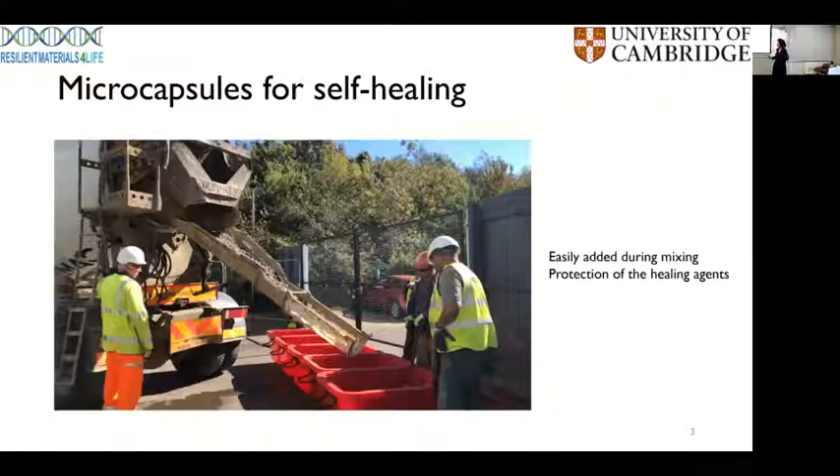And when we think about the history of people investigating microcapsules for self-healing, I think the first paper that I remember seeing was some papers with monofluorophosphate back in 2011. And I think the Pelletier paper with sodium silicate in polyurethane shells is also from 2011. Some earlier documents, when you think about the history, today it's a history class. When you think about the history of self-healing, there are some early documents of vascular systems with Dry in the early 90s. But when we are talking about capsules, they start in 2011.

And there has been a lot of progress since then from all kinds of materials, from minerals, epoxies, spores, MgO, and all the way to, I need to update this graph, but all the way to 2020. And two things that I would like to highlight from this process of producing microcapsules, now it's been 10 years that people have been investigating microcapsules for self-healing,

is that first, there are traditionally two methodologies to produce these microcapsules, broadly speaking. Either we are talking about having a liquid core, and those are all the processes that Dave was mentioning this morning, because then you have to produce an emulsion of this healing agent that is going to be your liquid core, and then deposit a shell on the interface of that emulsion, and then you have the core shell structure of the microcapsules that you want. It's either that way, or the other way, if you're encapsulating a core that is a powder or a solid core.

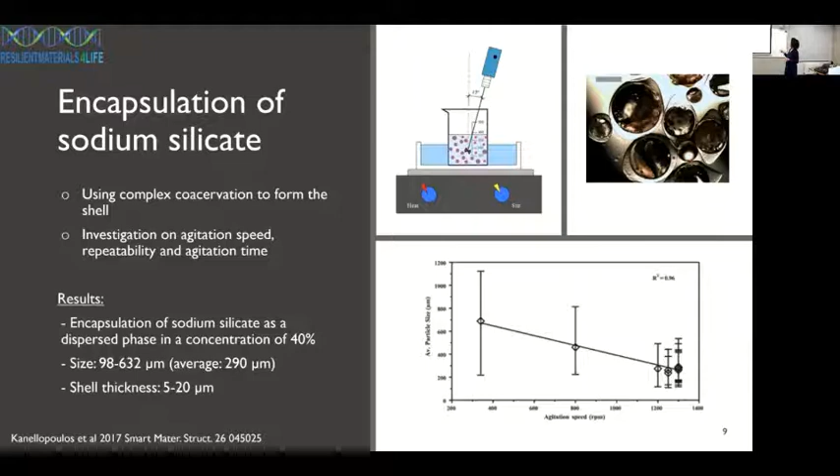But when I was talking before about the importance of fully characterizing the system as well, I included the thermogravimetric analysis to investigate the thermal stability of the shell, because you want to prove that it's stable. Some DMA analysis to investigate the mechanical properties of these shells.

I don't think that's the best SEM that I've ever seen in my life, but what it's basically showing here is the shell of that capsule after it was dried. One important property of these capsules is that when they are wet, they are very rubbery, as gelatin is when we're playing with it. But then when they are dry, they're very, very brittle, like those gelatin sheets when you buy them in the

supermarket. And that's very precious when we're talking about self-healing, because what you want is that the capsules are going to survive the mixing because they are rubbery. It will help with surviving the mixing. But then when they dry out, they are very brittle, and the crack is going to easily trigger the microcapsules as well. And FTIR for characterization of these capsules as well.

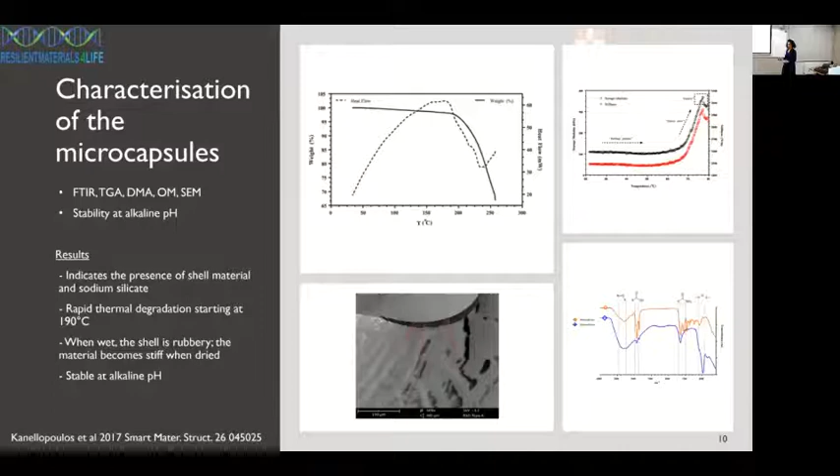And another thing that I didn't mention, but I'm mentioning now, is the stability of these microcapsules on pH, because you will, of course, want this capsule to be stable at high pH because it's the pH of the matrix.

When these capsules were embedded in cement paste, it's quite interesting because you can see the release of the core immediately. I don't think that's the best image, but as soon as you break that capsule, you can see the oil coming out of the capsules. They have a very good bond with the matrix, which is quite valuable for the capsules as well.

And it's interesting that they are fluorescent under UV exposure as well. So you can clearly see those capsules using optical microscopy to investigate the homogeneous dispersion of these capsules in the cementitious matrix.

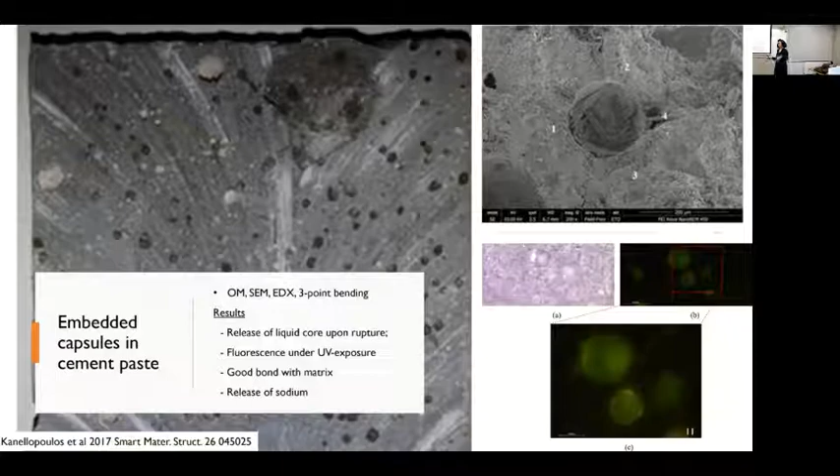When we were assessing the self-healing capacity of these microcapsules, those are the concentrations that were investigated. And what we see is that, yes, there is an increase of viscosity and a decrease in compressive strength by adding these microcapsules. And that's an interesting point.

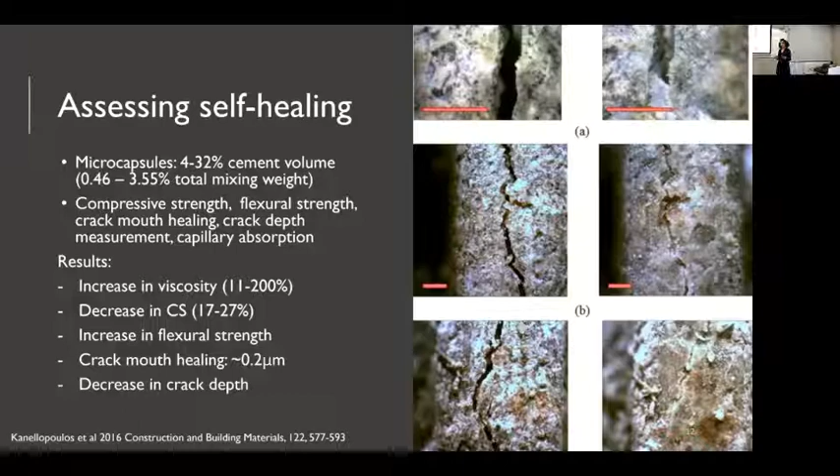So when we were talking about the crack mouth healing, it was around 0.2 microns. But a decrease in the crack depth was also noticed by adding these capsules. And another interesting detail to discuss here is that, when we are talking about sodium silicate for promoting self-healing, we are expecting that CSH would be produced in the matrix. That's the reaction that we were relying on.

And even though the crack mouth healing wasn't the best one compared with the literature, we have papers of capsules capable of healing up to 1 millimeter of crack mouth. We observe a very good recovery in the transport properties after adding these capsules.

That means that even though all the healing products were not necessarily deposited in the crack mouth, when we think about the crack being like a tip, some of the healing products would be deposited at the end of that tip, isn't it? So then we are going to have the recovery in the transport properties, even though the crack mouth healing wasn't 100%.

And that's where, when we look at Giannaros' paper, if you haven't come across it, 2016, they were talking much more about the crack sealing properties rather than healing itself. Of course, it has to do with mechanical properties as well, but yeah, we're talking about the recovery in transport properties.

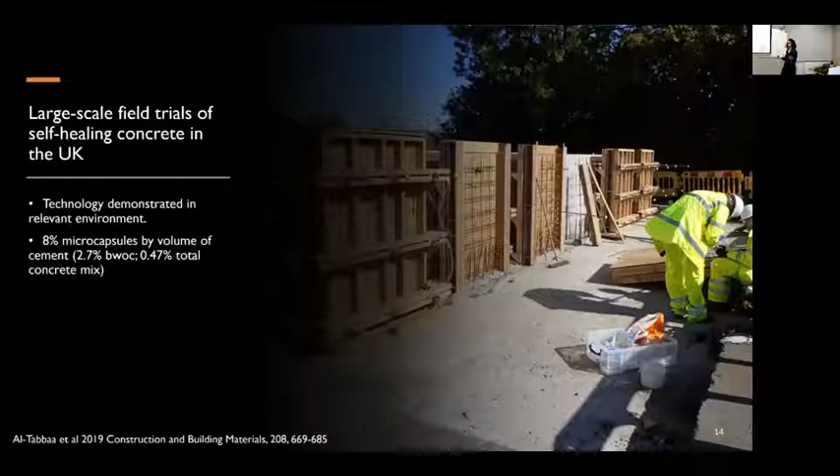So after these capsules were tested in the laboratory, we thought about testing them in large-scale field trials, and that happened with encapsulating 8% microcapsules by volume of cement, and producing those slabs with microcapsules being cast. And one thing that's interesting to point out here, well, there are several interesting things, but one is the sheer volume for producing that, which is quite larger compared with the lab tests that we were producing before.

And what we see are results that are similar-ish to the results that we observed in the lab. So a slight reduction in compressive strength, 63% of crack healing after 28 days, the reduction in crack depth, permeability recovered by the same mechanism that I was discussing before, some strength recovery with the microcapsules, and CSH and carbonation products were observed being formed in the crack healing.

This is the mechanism of healing that I was talking about before, but in addition to that, this was in Wales. And what is Wales famous for? Yes, it was raining quite a lot. So that's what the schematic shows here as well, showing that even though the healing products were deposited here, some of the healing products may have been washed away by the rain as well, which is why when we are discussing the results, the daily rainfall total was included in the results as well.

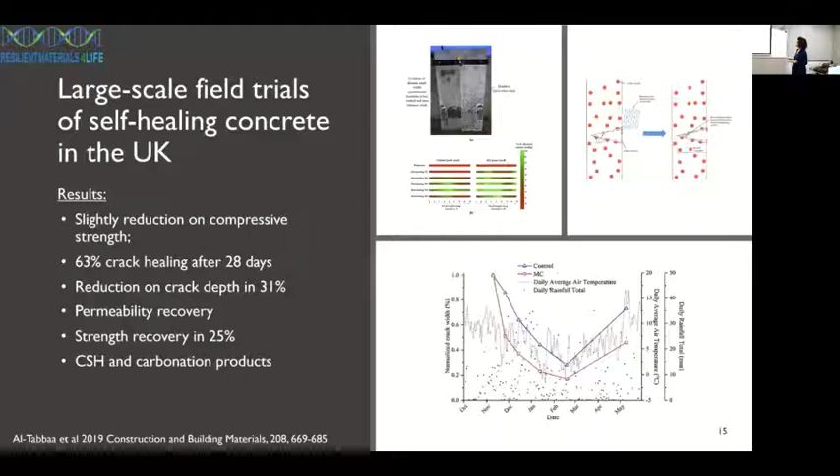After that, we had 2 commercial applications. So the first one, hopefully Abir is going to be showing those, no? Shipriya. So hopefully Shipriya is going to be showing that.

We produced some blocks that are here in the same building on the top of the building. And these blocks were cast in the wall containing microcapsules, and also some outdoor reinforced concrete slabs in the Dyson building that you were in yesterday. So that's the video that I was showing in the beginning. And these slabs are outside.

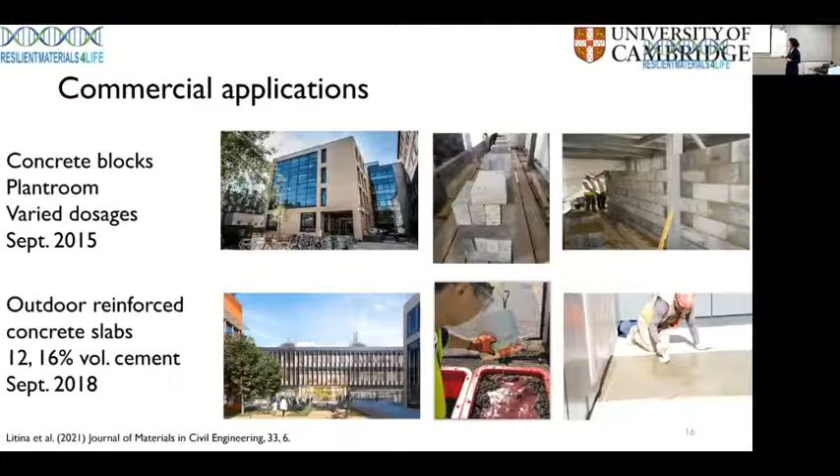Another thing that I would like to cover when we are talking about the gelatin gum arabic microcapsules was a work developed by Beni. Beni is going to present some of his work in the talk with Shipriya in a bit. But he also investigated the use of the same microcapsules for self-healing of cement bentonite cut-off wall materials. And what he noticed was an increase in the compressive strength of the cement bentonite systems and autogenous healing of 75% of the cracks larger than 0.15 millimeters, and a recovery in permeability as well.

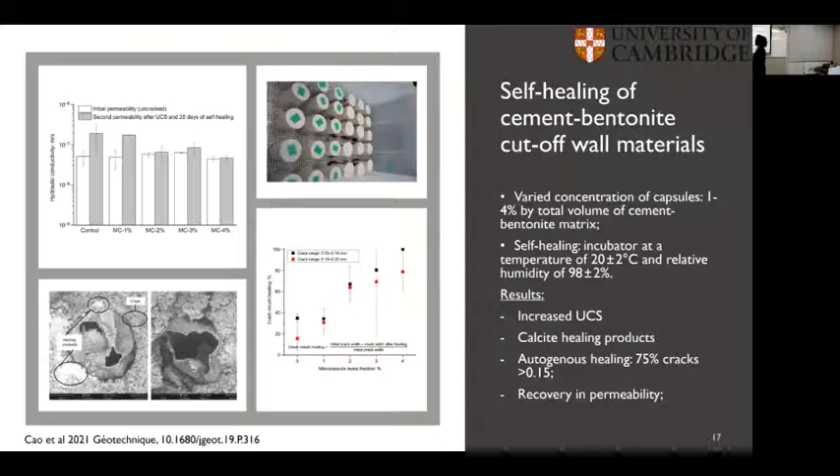So here we can see some of these capsules in the cement bentonite system. So the idea is the application of this kind of self-healing system for geotechnical applications, and the healing products around the microcapsules. You can see here, it was characterized with EDX.

Beni also did fantastic work trying to investigate the healing products in the cracks. And he did that through CT scan. Have any of you tried to work with CT scan here? The key point about the CT scan is that the sample needs to be really small when we are thinking about characterizing any products, because the size of the sample is going to be relative to the resolution as well. So if you want to see small cracks, you need a small sample.

So Beni had some small samples of cement bentonite that he cracked and incubated for 28 days in a high humidity environment. And then he observed that same sample again under the CT scan. And what he observed was some ruptured microcapsules, but also the crack filling of some of these capsules with the healing products associated with sodium silicate.

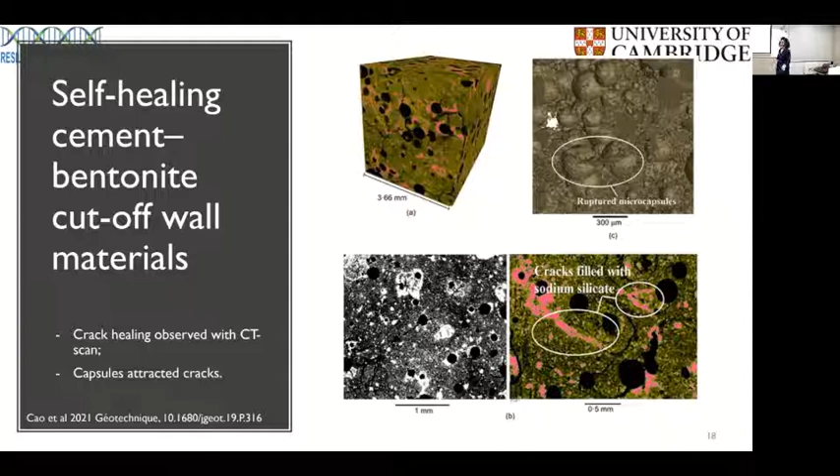So we're going to move to the acrylate microcapsules, or acrylate shell microcapsules.

Sorry, when am I supposed to finish this? Now? Okay. Absolutely. Okay.

This project is very close to my heart because it's something that I've been working with for quite some time now. So if I get emotional, bear with me.

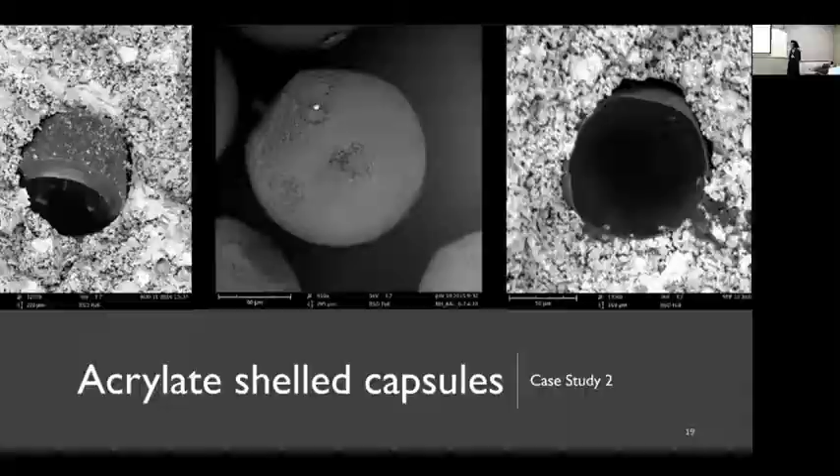I'm just kidding. Yeah, so changing from that capsule that we were talking about before, it was a gelatin gum arabic shell. Now it's changing to acrylate-shelled capsules. Right, microfluidics for the production of microcapsules. Here, what we are talking about is a methodology for producing emulsions. First, let's start with that. I was using microfluidics for producing emulsions that would then be capsules. And you're going to see that in the lab today.

The main thing about microfluidics is that the channels of a microfluidic chip are very small. So what you have is a laminar flow. You don't have the turbulence that you would observe in a traditional mixing system. So this is a traditional microfluidic chip, and that's the inside of the chip. You have one channel pumping liquids and coming across another channel. And here you can produce what we call a single emulsion.

That's what Dave was describing this morning so well, which is just like a droplet of oil in water or water in oil. But using microfluidics, you can use a second channel here to produce a double emulsion. So a droplet of water surrounded by a droplet of oil, surrounded by water as a continuous phase. And why is this important? Because then you can use that double emulsion as a template for producing microcapsules. You do that by exposing these double emulsions to UV light. That middle layer polymerizes and you have a solid shell and a liquid core.

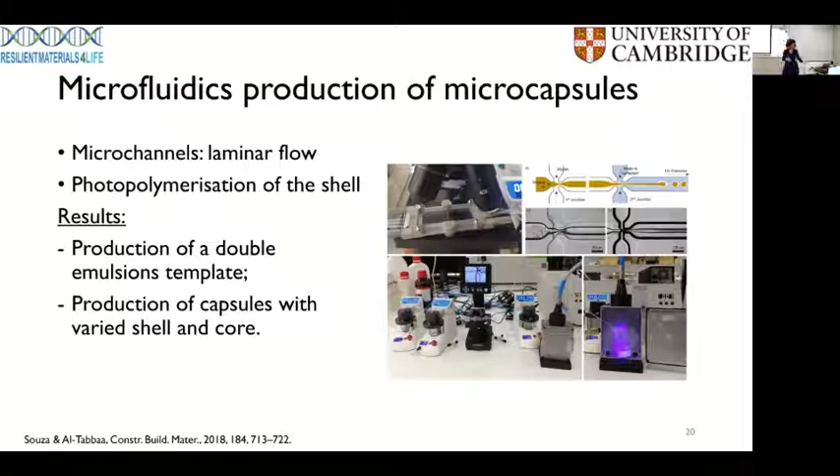Very often people ask me why I decided to work with microfluidics. The main point against it is, of course, the quantities of material produced. But when I started reading about capsules for self-healing in general, I could see a lot of results where I wished there were more detailed discussion on how the material was produced and its characterization. On top of that, one big question I had back then was: if water is so valuable for producing some of the self-healing products we are talking about, why can't we just encapsulate water and disperse these healing agents in a water phase?

Hopefully it's a question you may be asking, but hopefully not, because you've read my paper and you know that it's very tricky to do that. Water is a very small molecule and it's very hard to retain inside the thin shells of capsules. Even if you produce a capsule, so this is a double emulsion containing colloidal silica inside, and this is a capsule containing colloidal silica, when you dry that material, just the colloidal silica is retained inside the shell and all the water leaks out.

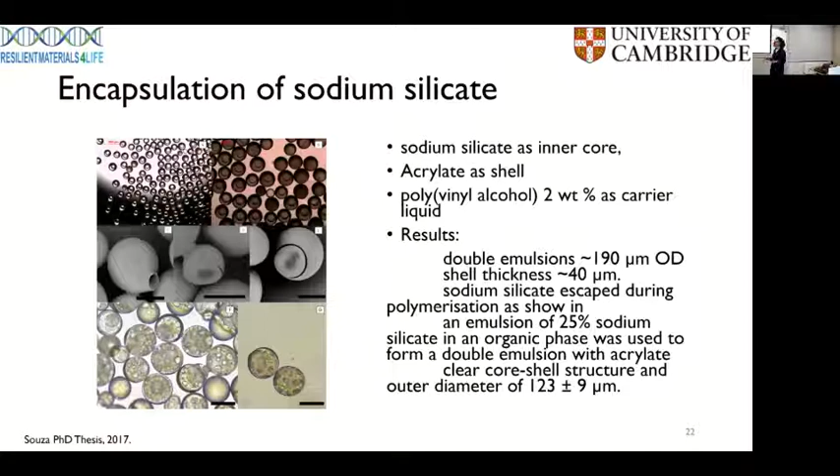Organic cores are a lot easier to encapsulate with techniques in general for producing microcapsules. On top of that, because the molecules are a lot bigger, they are retained inside the shell a lot more easily. So those are classic examples of double emulsions and microcapsules produced with an organic core. And for reasons I don't have time to explain, the shell is a lot thinner with an organic core. And of course, they are a lot easier to trigger as well. Here we are talking about a shell thickness of around 1 to 2 microns.

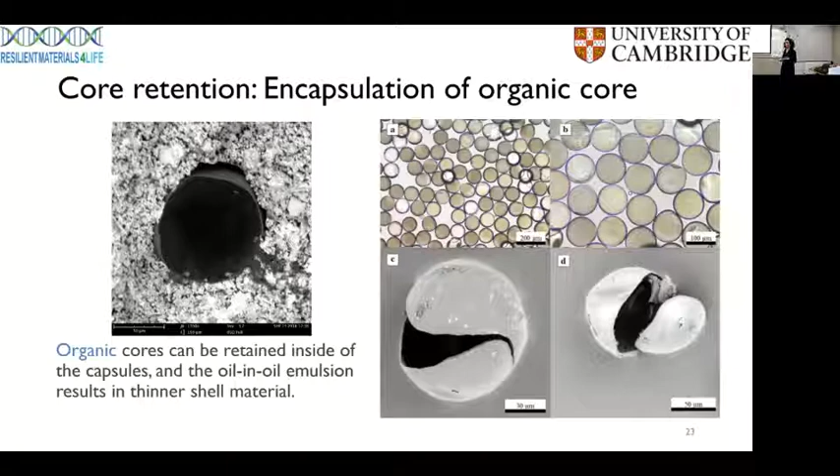Using microfluidics, there is also the chance of functionalizing the shell. It's not only to microfluidics, but it's a process that very often you have to do when we're talking about microcapsules. Because not necessarily there will be a good interfacial bond between the capsule and the cementitious matrix, or you want to increase the stability of the microcapsules. And one way of doing this is by investigating the functionalization of the shell with hydrophilic groups. So these are groups that are going to bond better with the cementitious matrix.

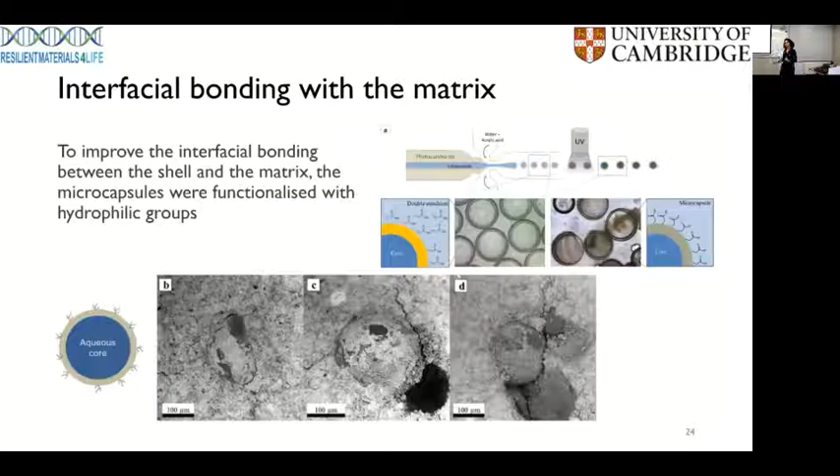Yeah, so when we're talking about physical triggering, those are the parameters that we want. A capsule that has an aqueous core, a hydrophilic shell, and a thin shell to be physically triggered as well.

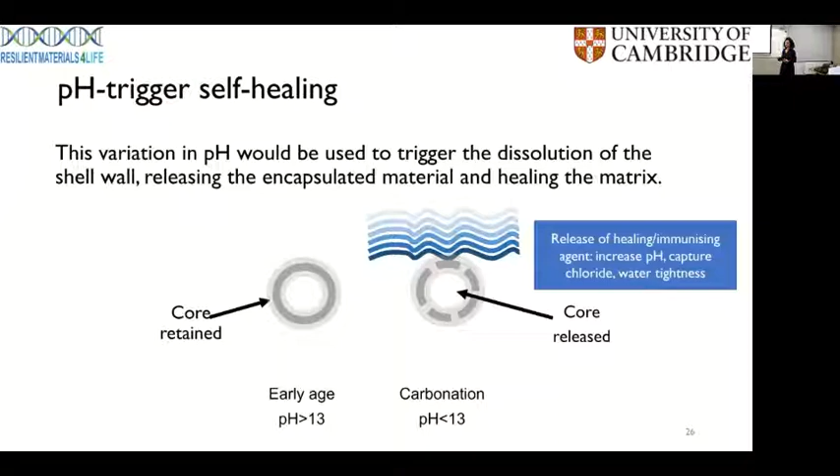I also investigated microfluidics to produce capsules that are pH triggered by putting a pH sensitive chemical inside of that acrylic shell that will then be triggered by a change in the pH. So that's the idea, that when we have an alkaline pH, we have the retention of the core, and then the core would release when the pH is decreasing. That's very challenging. Any of you know why?

Or did I lose you already? Seven slides ago. Any idea of why that could be challenging? No? Okay, that's homework for you guys. You can only go punting on Saturday if you know the answer to this problem. Otherwise, no punting for you, no pints for you, and no tour for you.

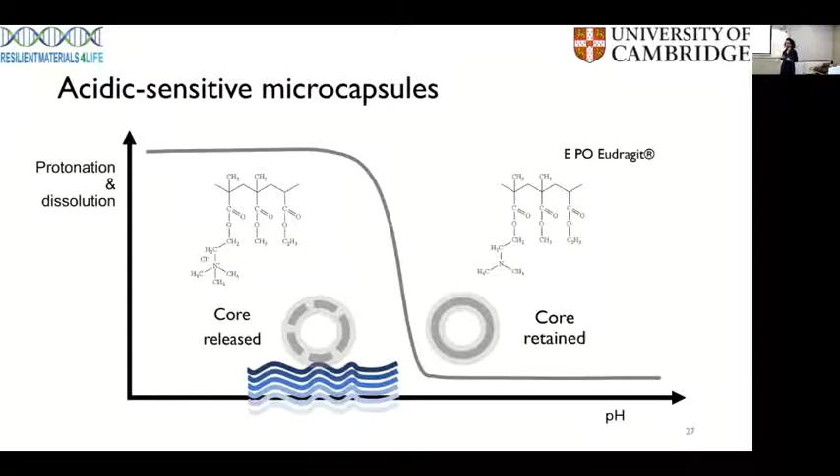Moving along, and that's coming close to the end of my presentation. Of course, the problem with using microfluidics is that the quantities are really small. We are talking about 1 gram per hour of material being produced. So one way to deal with it, quite similar to what Dave was proposing, is parallelizing, putting several of these microfluidic chips in parallel. And then what you have is a higher production rate of these systems.

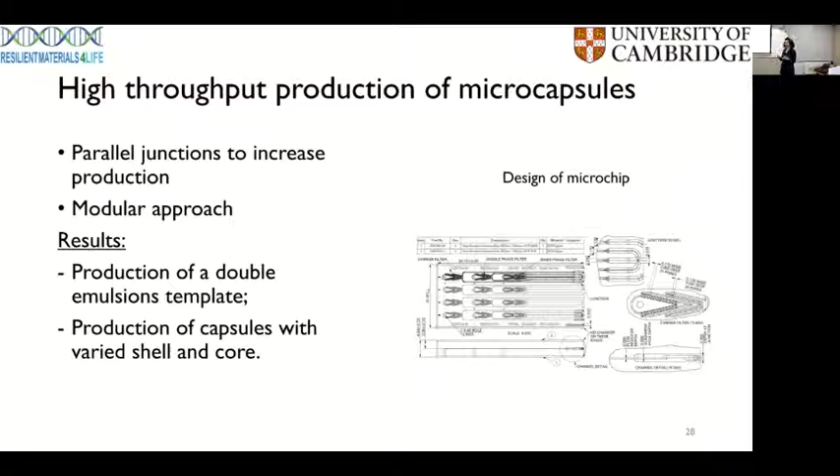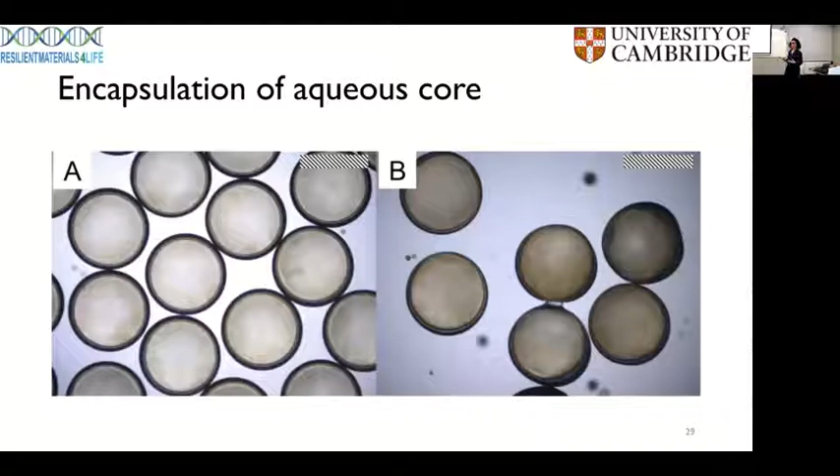So this is kind of the face of the microfluidic chip. You're going to see one in the lab this afternoon. This is the type of capsules that are being produced. It's quite similar to the results that I was showing before. But here, what I'm showing is an aqueous core with amine being encapsulated, so it's a kind of different liquid phase, and a larger capsule as well. We're talking about 500 microns.

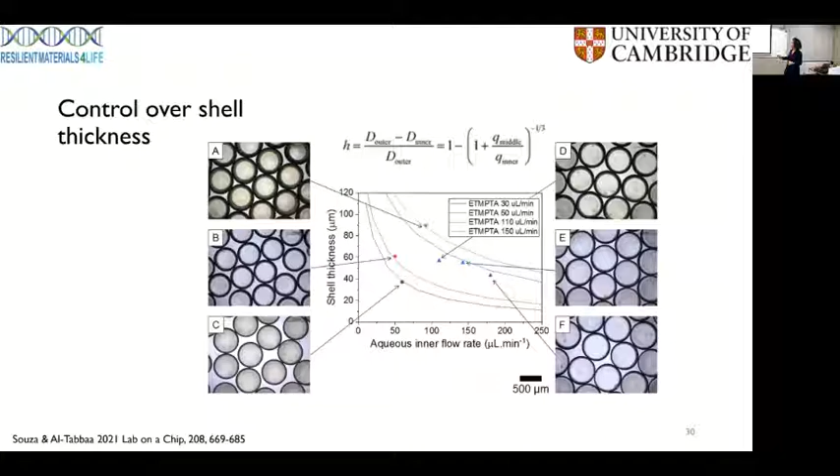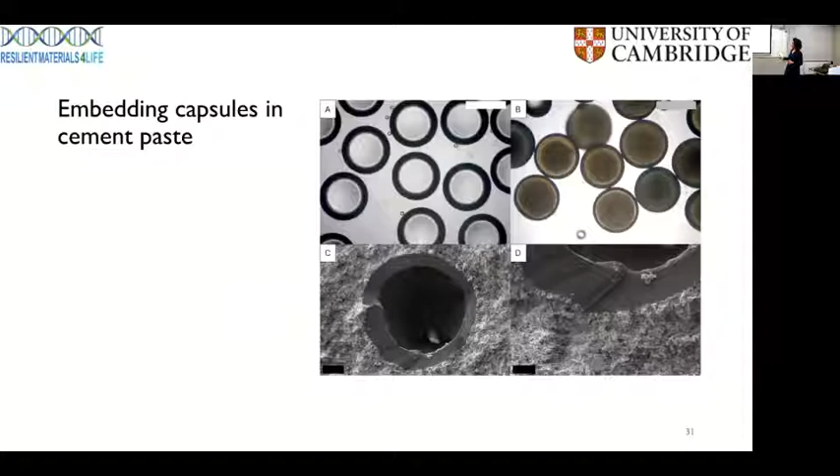We can control the shell thickness of these microcapsules when they are produced by this equation. So when you increase the inner flow rate, you decrease the shell thickness of these capsules. So you can work from thick, which is not interesting for us, all the way to thinner shells. Playing with different acrylates that are going to offer a better bond with the cementitious matrix as well. So this is an SEM of these capsules in cement paste. And here is the beloved CV that Dave was talking about.

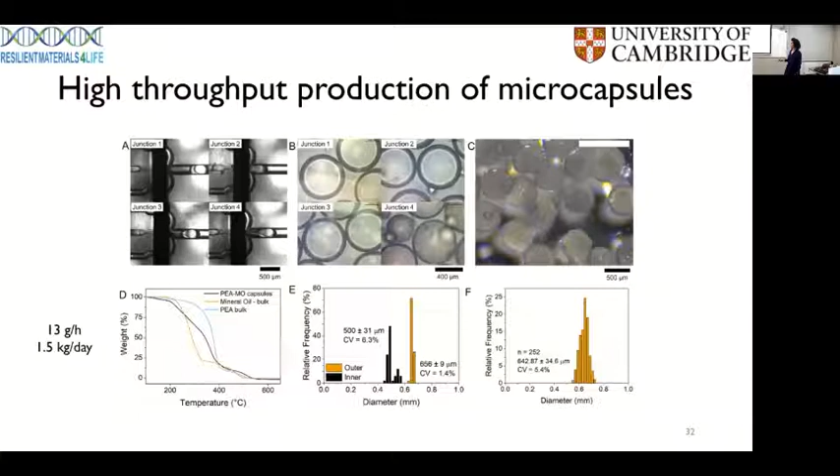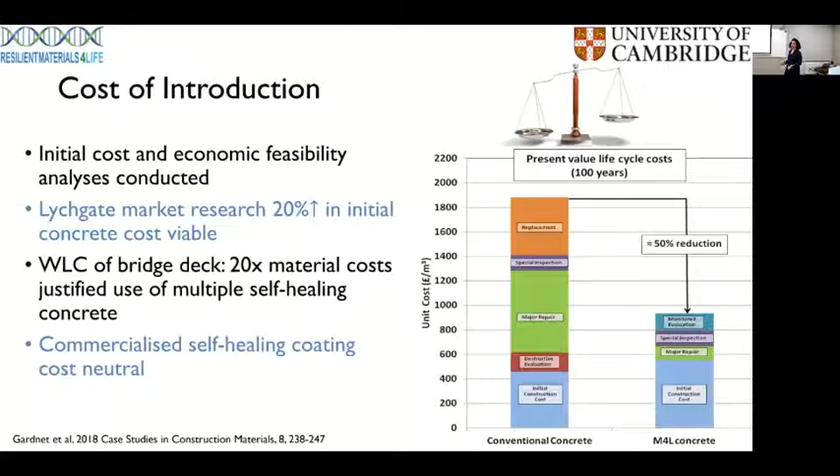And this is where I would be talking about technical readiness level, but it's a little bit short of time. But I want to invite you guys to think about, when we're talking about technical readiness levels of all these technologies, and that's homework too before punting, otherwise no punting for you, where do you think those technologies would be? And that can be a very valuable exercise when you're thinking about your PhD in general as well.

Yeah, that's it. So in conclusion, I was discussing the potential of these microcapsules for cementitious systems, this range of laboratory tests, challenges for encapsulation, and if you don't take anything from this talk, just remember it is challenging to produce microcapsules, and field trials and commercial application of these microcapsules.